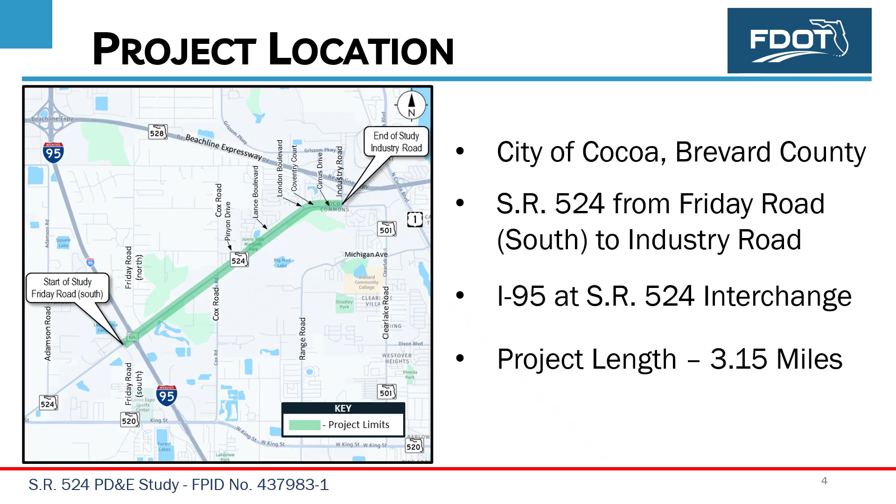This PD&E study is located within the City of Cocoa in Brevard County, and it involves improvements along State Road 524 from Friday Road South to Industry Road. The project also involves modifications to the I-95 interchange. The length of the project is approximately 3.15 miles.

The purpose and need of this project is to accommodate existing and future travel demand, and to enhance safety along State Road 524 for vehicles and for bicycles and pedestrians.

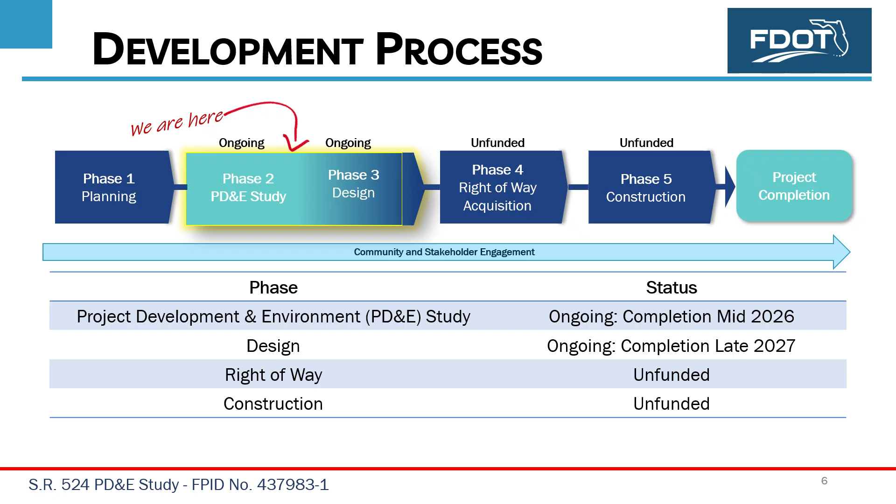The project development process involves 5 phases: planning, project development and environment or PD&E, design, right-of-way acquisition, and construction. We are currently in the PD&E study phase. For this project, the PD&E and design phases are overlapping to expedite the process. Looking ahead, the right-of-way phase and the construction phase are not currently funded.

A project kickoff newsletter was sent to the public in March 2019. The study team coordinated throughout with the City of Cocoa, Space Coast Transportation Planning Organization, and Brevard County on various elements of the project, as well as meeting with local stakeholders, including homeowners groups, recently built apartment complexes, and other area groups to get the word out about the project and gain public input.

An alternatives public meeting was also held on May 4, 2021, where the team presented alternatives which led to the preferred alternative being presented at this public hearing.

The public provided input on various intersection types and typical section elements, including median and lane widths and bicycle pedestrian accommodations. As project details were refined, other elements, including the proposed interchange improvements at I-95, proposed noise barriers, and proposed intersection improvements, have been coordinated with stakeholders in advance of this public hearing.

This public hearing is another opportunity for public input on the preferred alternative being presented.

This project has been identified and shown in the cost-feasible portion of the 2045 Long-Range Transportation Plan of the Space Coast Transportation Planning Organization, or TPO. The design phase of this project is also included in the TPO's Transportation Improvement Program for fiscal years 2026 to 2030. The project area has experienced growth in recent years.

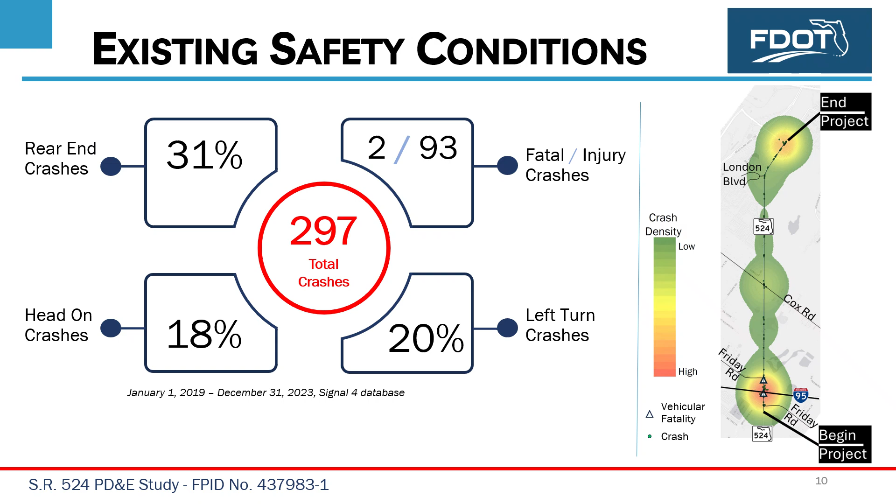It should be noted that the existing State Road 524 has a lack of pedestrian and bicycle features. Since future traffic volumes are projected to increase substantially, crashes are also anticipated to increase if no improvements are made to this corridor. In this study, we are evaluating a no-build alternative and one build alternative which offers various improvements. The no-build alternative will maintain the existing roadway lanes and interchange configuration.

Although it does not address the project's purpose and need, the no-build alternative was carried through the project evaluation as a baseline for comparison purposes, as per the PD&E study guidelines.

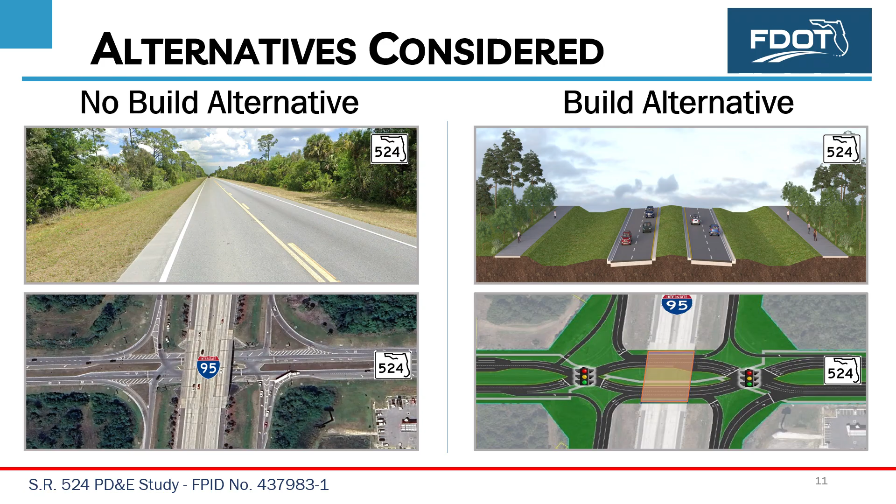The build alternative was developed based on an evaluation of existing data, including crash history, roadway conditions, intersection operations, and future traffic demands. The build alternative involves widening State Road 524 from 2 lanes to 4 lanes, with 2 lanes in each direction and a raised grassed median separating the directions of traffic.

A shared use path is proposed on both sides of the roadway to accommodate bicycle and pedestrian users. The I-95 interchange will be reconfigured to improve traffic operations and safety, and the existing I-95 bridges over State Road 524 will be replaced.

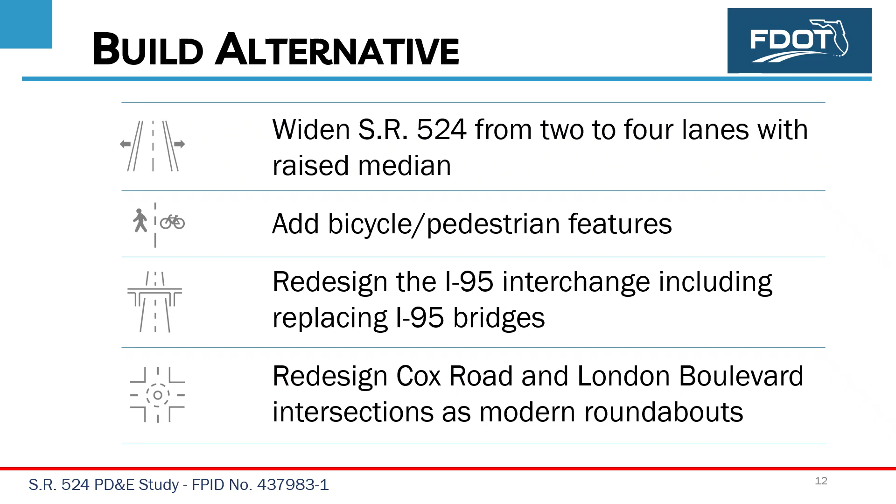Intersections throughout the project will be upgraded with turn lanes, and the intersections at Cox Road and London Boulevard will be reconfigured as roundabouts to enhance safety by reducing vehicle conflicts, encouraging lower speeds, and improving traffic operations.

The I-95 interchange is proposed to be converted to a diverging diamond interchange, or DDI, and the signals will operate in coordination with the adjacent intersections at Friday Road South and North, which will also be signalized. The DDI will provide improved traffic operation, reduced delay, and reduce the number and severity of crashes at the interchange.

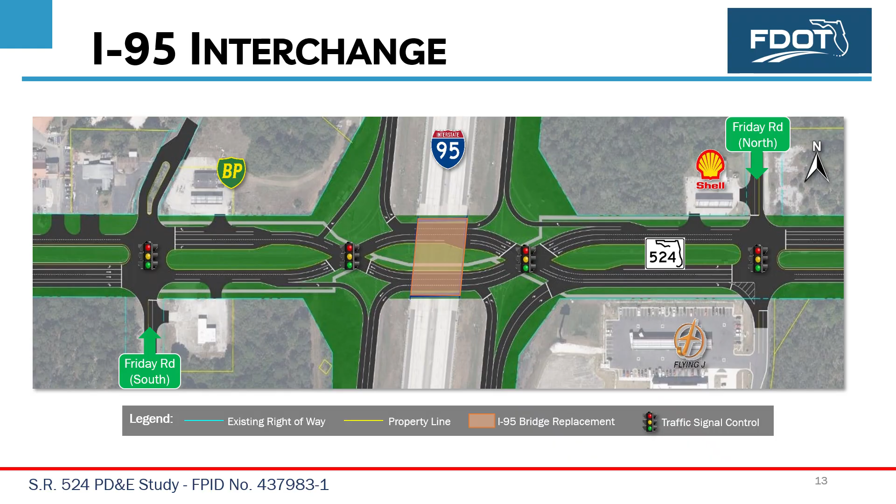These graphics show what State Road 524 will look like under the preferred alternative. The road will be widened from 2 to 4 lanes, with curb and gutter directing stormwater to a closed drainage system, with underground inlets and pipes conveying to off-site ponds.

From Friday Road North to Cox Road, and then from London Boulevard to Industry Road, the median width will be 22 feet wide. From Cox Road to London Boulevard, the median width will vary from 22 to 60 feet. The varying width will allow the lanes to gently shift to encourage lower speeds.

All lanes will be 11 feet wide also to encourage lower speeds, except from Friday Road to Cox Road, where the outside lanes will be 12 feet wide to accommodate heavier truck movements to and from the I-95 interchange. 14-foot wide shared use paths will be provided on both sides of the roadway throughout the project.

Intersections will be improved, and access will be managed within FDOT access management guidelines to minimize vehicle conflicts. All roadway improvements are proposed within the existing right-of-way, except at Cox Road and London Boulevard intersections, where minor right-of-way, in the form of corner clipping, will be needed to accommodate the intersections.

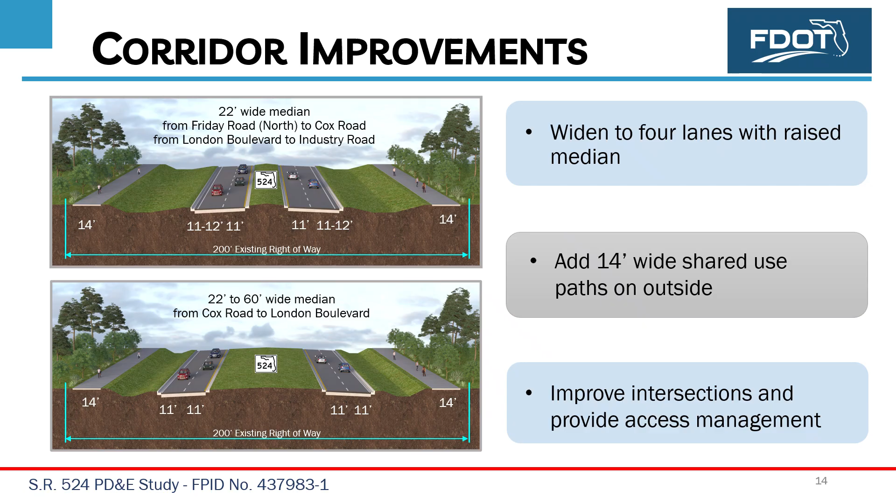The build alternative was selected as the preferred alternative for the following reasons. It enhances safety by adding a raised grass median which separates opposing lanes of traffic, thereby reducing the chances of motor vehicle crashes and improving intersections throughout the corridor.

Also, the build alternative adds shared use paths that enhance the safety and travel of pedestrians and bicyclists. The proposed improvements in the build alternative increase capacity along State Road 524 and at the I-95 interchange, thereby accommodating future traffic growth in the project area.

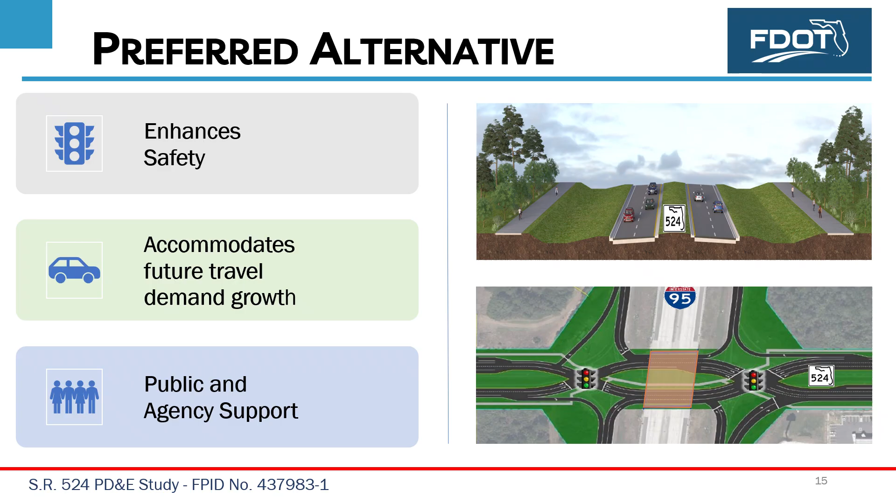Additionally, public input was considered in the selection of the preferred alternative.

Various intersection concepts were evaluated in this project utilizing FDOT's Intersection Control Evaluation process. As a result of the evaluation, a traditional signal control will remain at the Walmart distribution entrance.

A modern roundabout is proposed at the Cox Road intersection, and directional median openings are proposed at the Pinyon Drive and Lance Boulevard intersections.

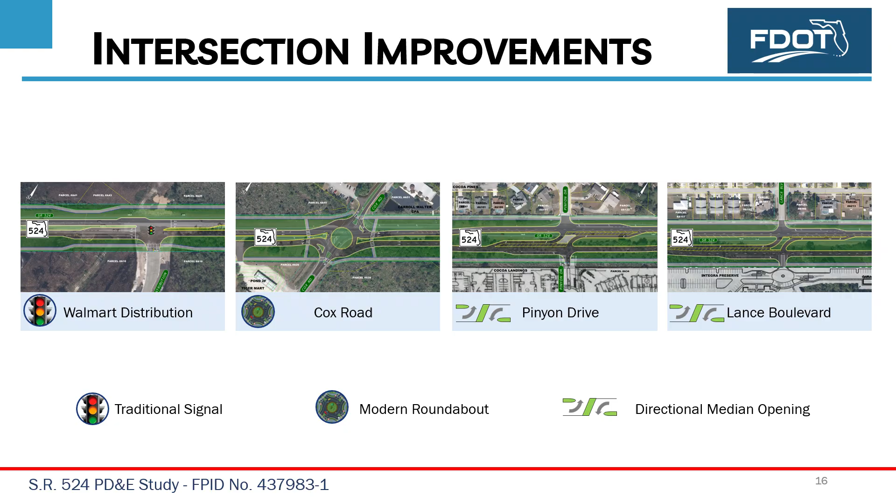Continuing east, a modern roundabout is proposed at London Boulevard, a directional median opening is proposed at Coventry Court, and traditional signal control will remain at the Cirrus Drive and Industry Road intersections.

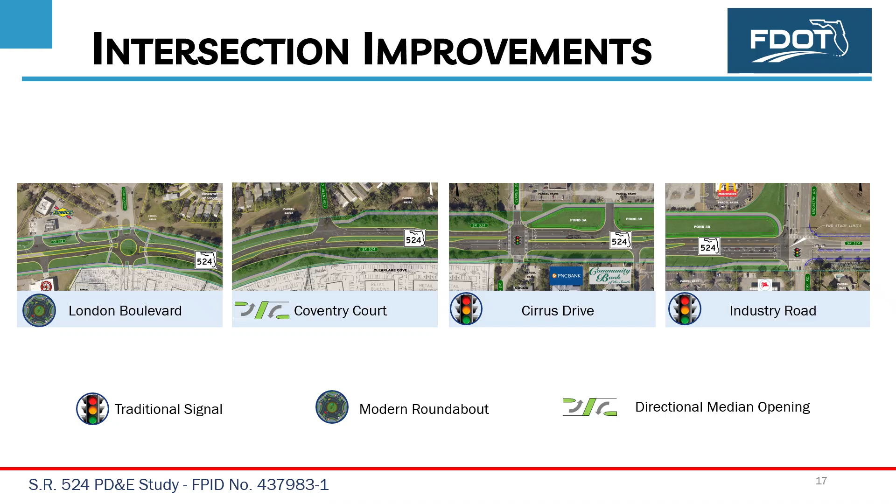There are various benefits of the proposed modern roundabouts in contrast with traditional traffic circles. Unlike traffic circles, modern roundabouts are designed with a focus on safety and traffic flow efficiency. Modern roundabouts function through yielding, thus eliminating full-stop conditions and delays associated with traffic lights.

Connectivity and safety benefits include allowing continuous traffic flow where drivers keep moving through the intersection without stopping. This can increase intersection capacity up to 50%.

Modern roundabouts can result in less severe crashes when compared to regular intersections due to the reduced conflict points and the elimination of head-on and high-speed right-angle collisions.

Additionally, roundabouts have 90% fewer fatalities and 75% fewer injuries due to the removal of right-angle, head-on, and T-bone conflict movements. They can also reduce up to 40% of pedestrian and bicycle crashes.

Benefits also include maintaining functionality during power outages and lower construction and maintenance costs when compared to traditional signalized intersections.

This PD&E study is evaluating potential impacts to the social and economic, cultural, natural, and physical environments associated with each alternative.

The project has been evaluated with respect to Presidential Executive Order 11990, Protection of Wetlands, and Executive Order 11988, Floodplain Management and Protection. Avoidance and minimization of impacts to these features were considered in the selection of the preferred alternative.

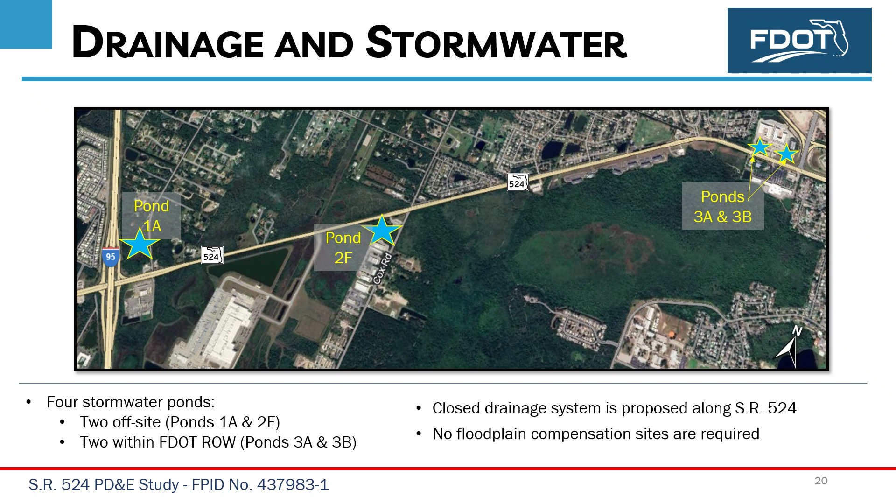A drainage analysis was conducted to identify and assess potential locations for stormwater ponds that would provide both water quality treatment and flood control along the corridor. The 4 selected ponds are Pond 1A near I-95, Pond 2F at Cox Road, and Ponds 3A and 3B located near Industry Road.

A closed drainage system is proposed, and no floodplain compensation site is required. The preferred alternative adds a median along State Road 524 from Friday Road South to Industry Road. It maintains the locations of all existing intersections and provides median openings at several locations according to the access management standards.

The current access management classification is proposed to change from Type 3 to Type 5 between Friday Road South and Friday Road North. The existing non-restrictive classification of 4 is proposed to be changed to Classification 3 from Friday Road North to Cox Road and to Classification 5 from Cox Road to Industry Road. Both classification types 3 and 5 include a restrictive median.

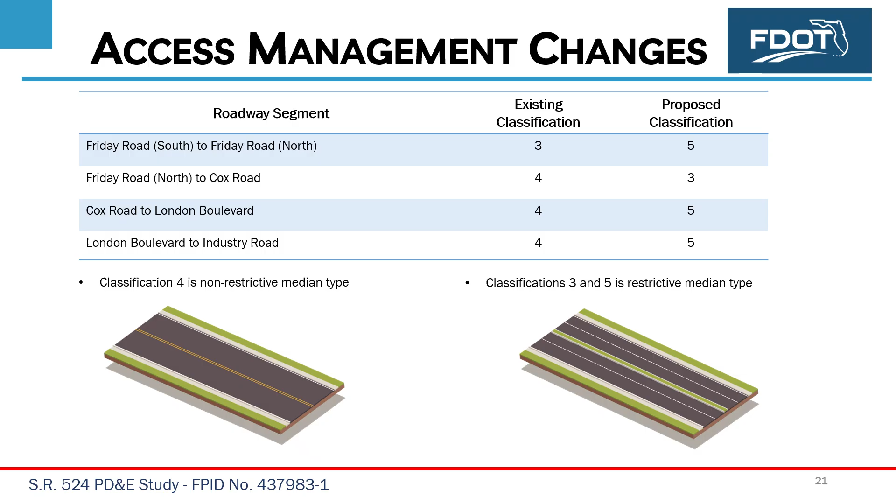The concept plans show the access provided at each existing intersection. This project is being developed in accordance with Section 335.199 of the Florida Statutes, requiring FDOT to notify all affected property owners, municipalities, and counties of a proposed project that will close or modify an existing access to an abutting property owner at least 180 days before the design is finalized. Right-of-way acquisition is needed for intersection improvements and stormwater management ponds.

We anticipate 14 parcels will be impacted, totaling 8.29 acres. One of the unavoidable consequences on a project such as this is the necessary relocation of residences or businesses. On this project, we anticipate the relocation of one business and no residential relocations. All right-of-way acquisition will be conducted in accordance with Florida Statutes 339.09 and 421.55 and the Federal Uniform Relocation Assistance

and Real Property Acquisition Policies Act of 1970, commonly known as the Uniform Act.

If you are required to make any type of move as a result of a Department of Transportation project, you can expect to be treated in a fair and helpful manner and in compliance with the Uniform Relocation Assistance Act. If a move is required, you will be contacted by an appraiser who will inspect your property. We encourage you to be present during the inspection and provide information about the value of your property.

You may also be eligible for relocation advisory services and payment benefits. If you are being moved and you are unsatisfied with the department's determination of your eligibility for payment or the amount of that payment, you may appeal that determination. You will be promptly furnished necessary forms and notified of the procedures to be followed in making that appeal.

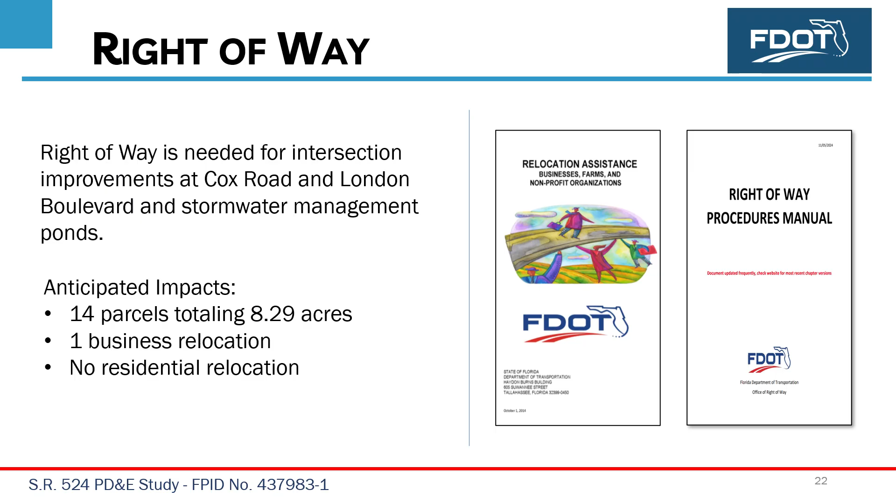A special word of caution: if you move before you receive notification of the relocation benefits that you might be entitled to, your benefits may be jeopardized. The relocation specialists at the in-person hearing will be happy to answer your questions and will also furnish you with copies of relocation assistance brochures.

Overall, acquisition of right-of-way from 14 parcels for a total of 8.29 acres will be needed to accommodate stormwater ponds and the roadway improvements. The build alternative will not cause any residential relocation, and one of the pond sites will require a business relocation. There are not anticipated impacts to historic and cultural resources, nor from any recreational resources.

The proposed roadway widening and pond sites would result in direct permanent impacts to 7.36 acres of wetlands. Most of these wetlands are located within the existing roadway right-of-way. 27 plant species, 16 listed wildlife species, and 1 candidate wildlife species have the potential to occur within the project area. However, the likelihood of the project's potential impact to these species is low.

7 potential contamination sites adjacent to the project have a medium or high likelihood of being affected by the build alternate. There are 63 noise-sensitive sites adjacent to the project, including single-family and multifamily homes. Analysis of the predicted noise levels associated with the build alternative indicates that implementation would not cause substantial noise level increases, and noise walls are recommended at 3 locations as shown on the concept plans.